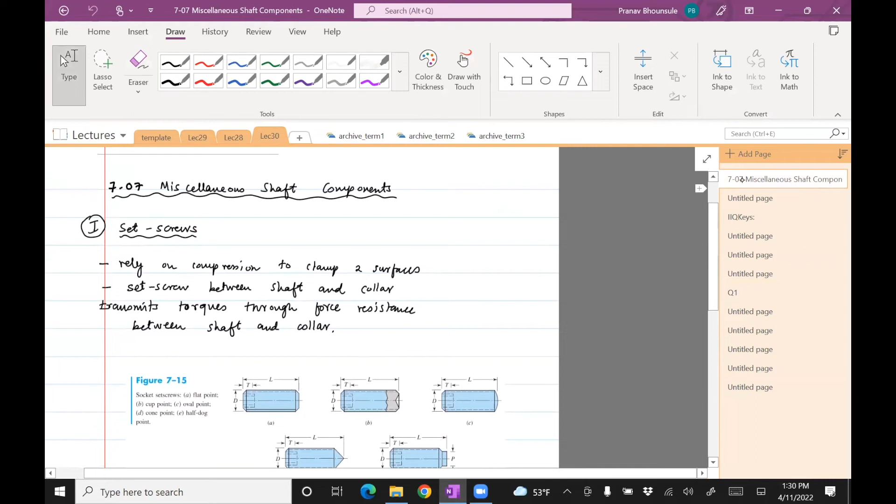So this part is on how shaft components are secured to the shaft. One of the ways is to use set screws.

Set screws are things which you usually screw in, and in the shaft there is a thread which you drill through, so that you can use a set screw to hold on to whatever shaft component you want to the shaft.

So these are some of the set screws which I took from the book. A bunch of them. I don't really have anything special to say about any of them.

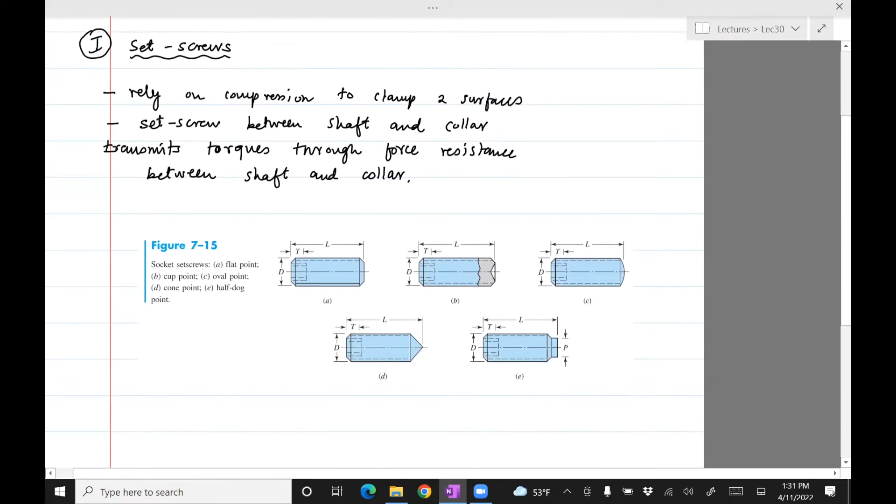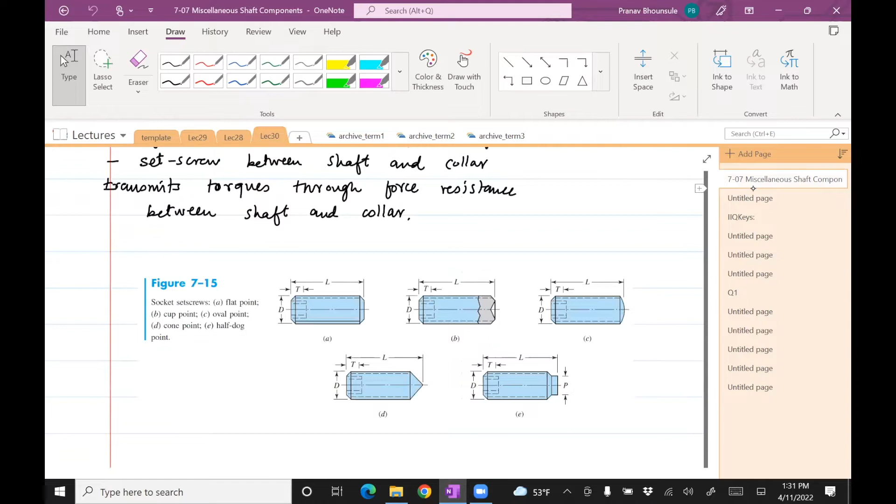When it comes to choosing some of these set screws, there is a seating torque and holding power, and I think you should know what these things mean. So for that, what we need to do is analyze a set screw when it is tightened.

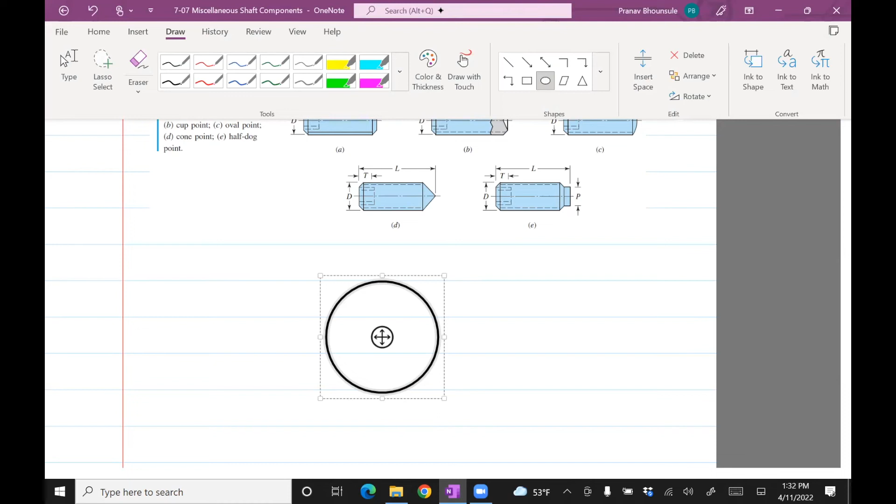So what I'm going to do is draw a top view, or the front view. This is a shaft. And what I'm going to do is attach the shaft to a collar. A collar is just one of the many things you can attach using a set screw.

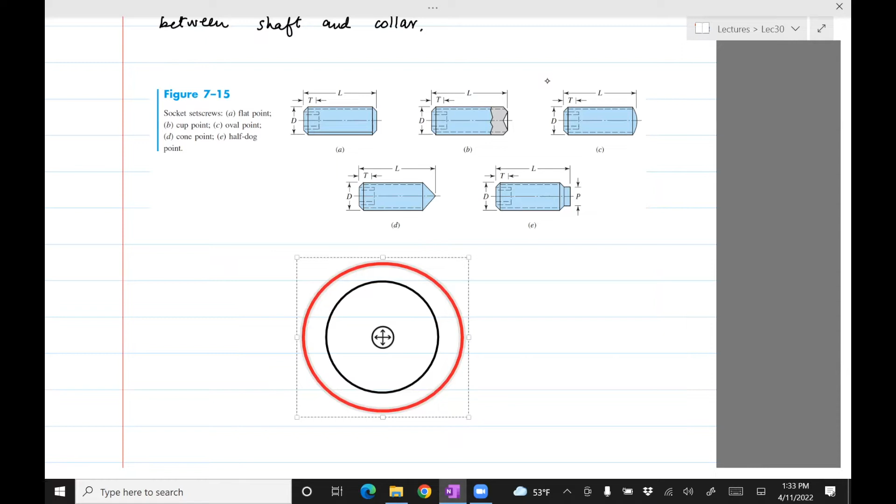Let's try with a different color, red. Okay, looks centered. So this is our shaft, this is the collar, and the set screw is...

It's basically one of these things. It's set there such that it can hold the collar against the shaft.

So assume that this whole thing is torqued. Remember that the purpose of the set screw is to hold things when they are torqued, not really to take axial loads. Axial loads would be loads which you see, in this case, into the plane of the paper. We're not designing the set screw for that.

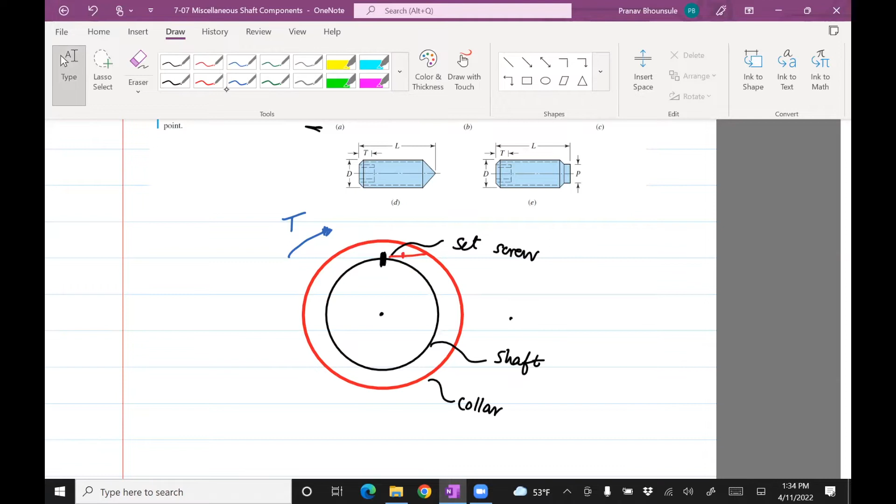The way the set screw holds on to this, or rather keeps this sturdy, is through a force. That force is a holding force. Assume that this diameter is capital D.

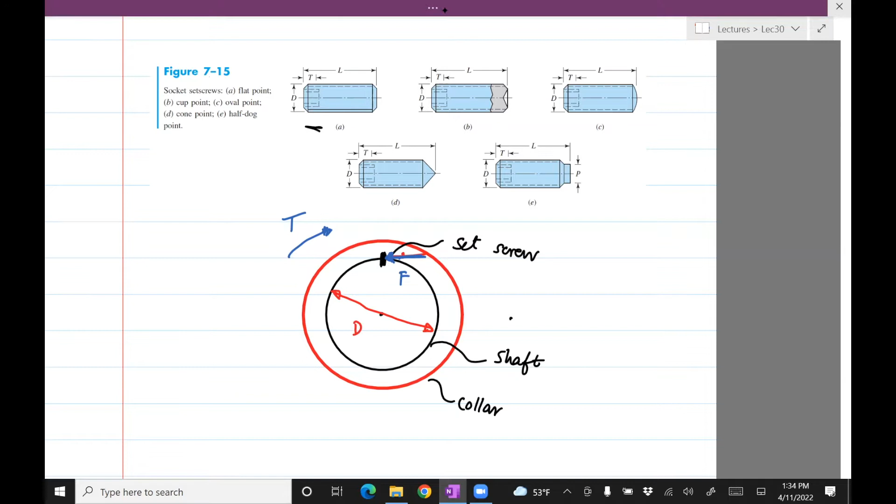So all you need in order to find the torque, compute the torque, is capital F times D divided by 2, right?

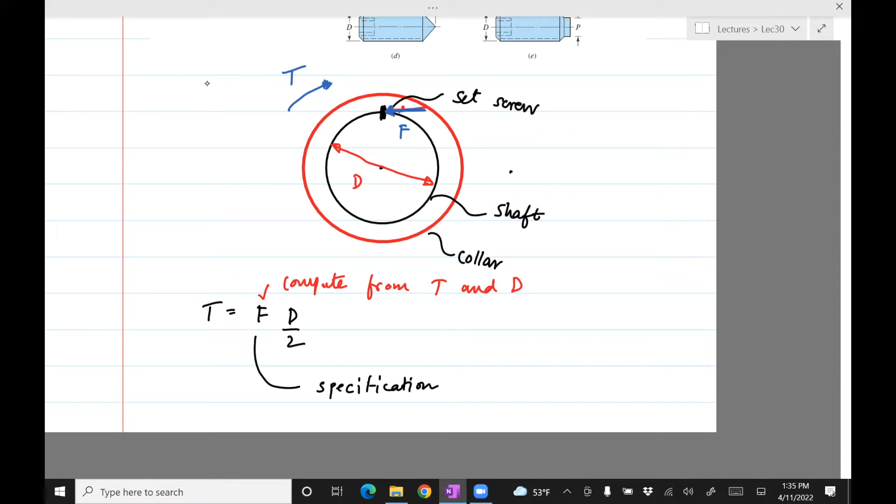So this F is a specification. What you'll do is, if you're given an external torque, and you know the diameter of your shaft, you will then compute F from T and D, right? T comes from your application, D comes from your design, and once you know F, you go to this table.

This says power, but it's really force. And based on what force you want, you'll choose the right set screw.

That's pretty much it. Professor, I have a question: if the F is in the middle of the two values, then what do we have to do? You'll obviously choose the higher of the ones, right? So for example, if it is 300, so your set screw needs to hold a force of 300.

So you'll use the higher of the two, right? You'll use 385, because if you use 250, then it'll get crushed. Just like diameters, if your diameter is lower than something not in the spec sheet, you choose the higher diameter, because if you choose a lower one, your factor of safety goes down. Makes sense, thank you.

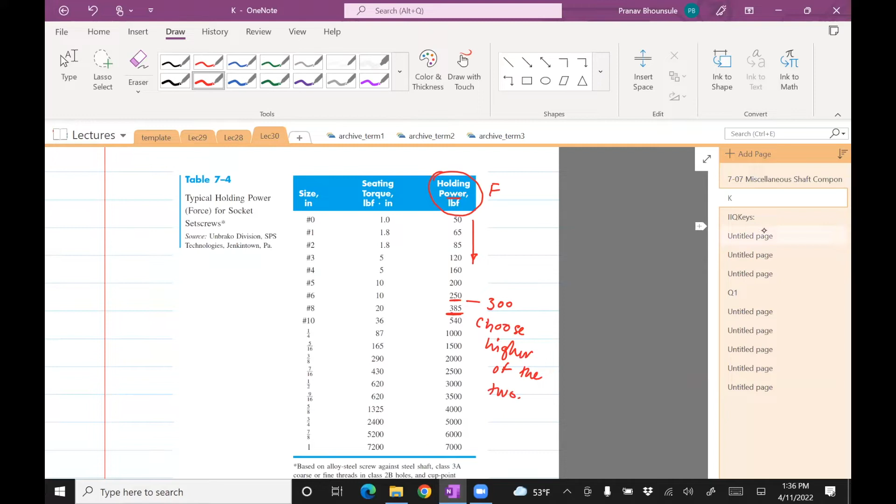Choose higher. Okay, so that's pretty much what is there for set screws.

Here's another way to connect two things on a shaft, whatever you want on a shaft. These things are called keys. This is showing how the key is really attached. It's basically a shaft, which is the inner one. The outer one could be a collar. And then you basically make a keyway inside the shaft.

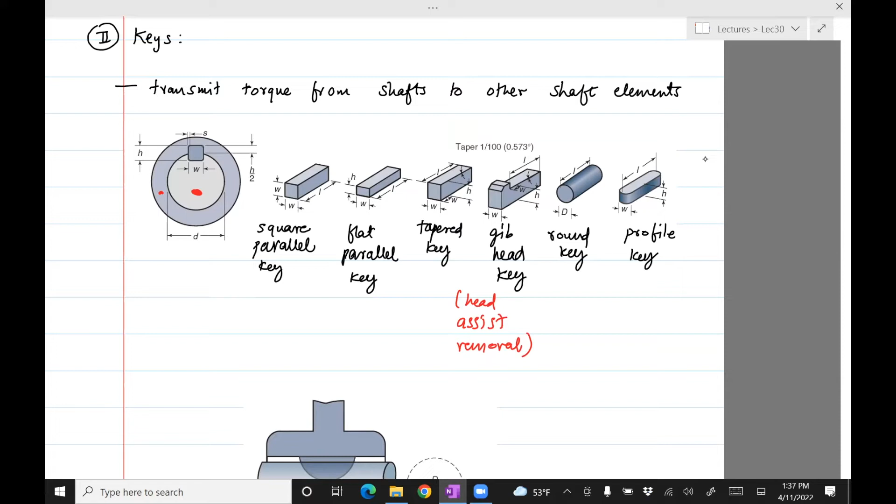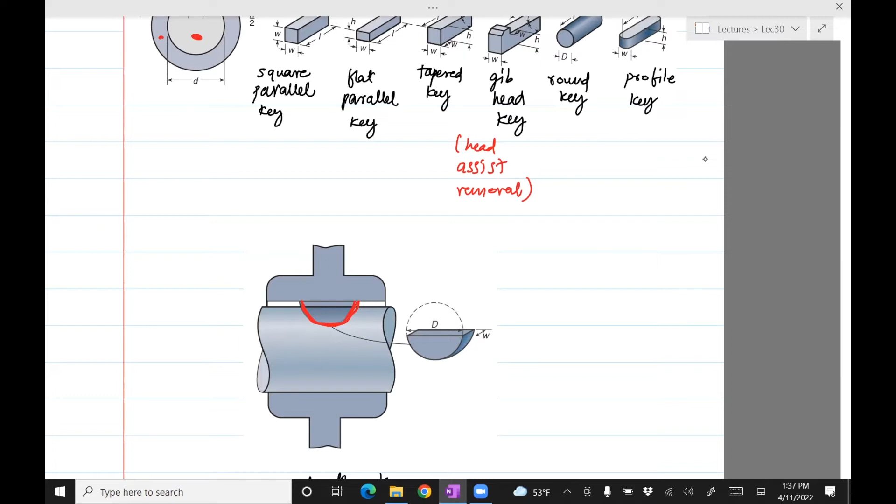Maybe the diagram is here, so you can see this. This is actually a specific type of key, but there is basically a groove inside the shaft. So for example, the shaft, this is the shaft.

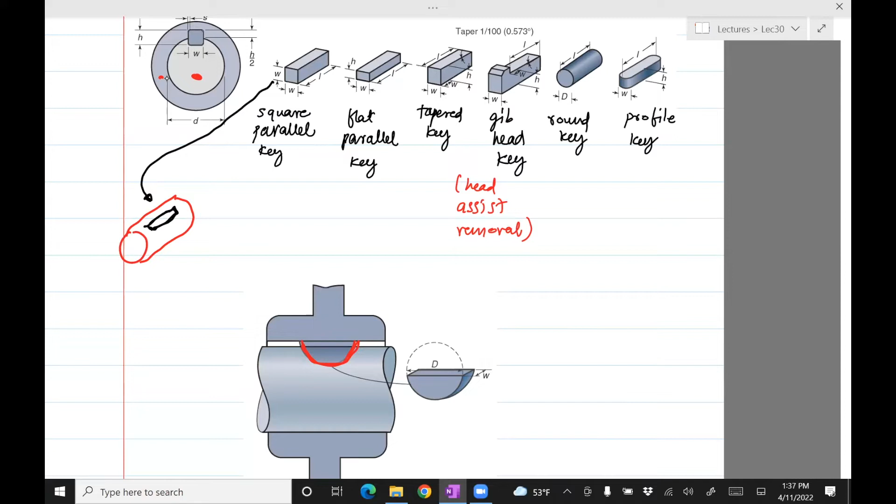What you'll do is you'll make a keyway, such that this key, any of these keys, will fit inside this, but you'll ensure that it fits only half of its height inside this. The other half goes inside the collar. So you can see this: some of it is inside the shaft, some of it is inside the collar. And that way you can hold things together.

So this is one type of key: square parallel, flat parallel, tapered key, gib head key. The reason why you want to have a head is because it's easy to remove by just pulling onto this part. Round key, profile key.

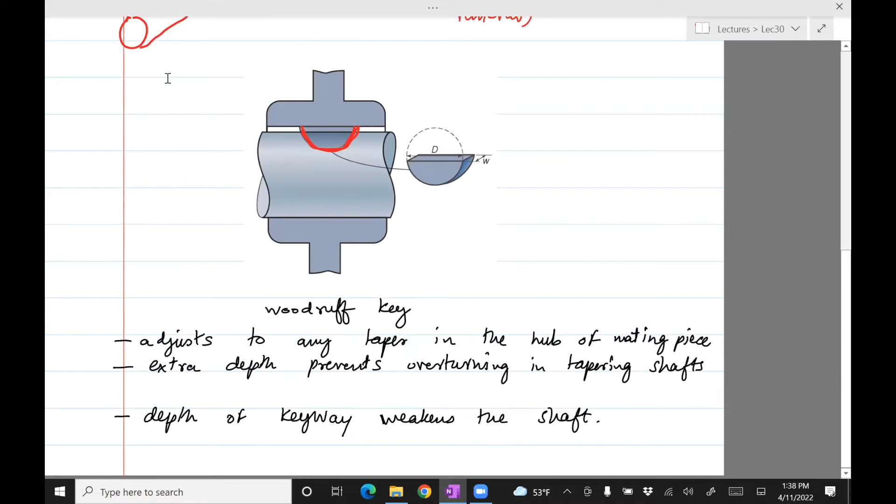This is a Woodruff key. So there's a specific advantage of the Woodruff key: it has a higher depth, and that basically prevents overturning, as it's written down here. The issue with putting something so deep is that it basically weakens the shaft. So each of them has its own advantages and disadvantages.

So even though this one prevents overturning, it weakens, and these keys don't quite have that much force in holding. So there's always a compromise.

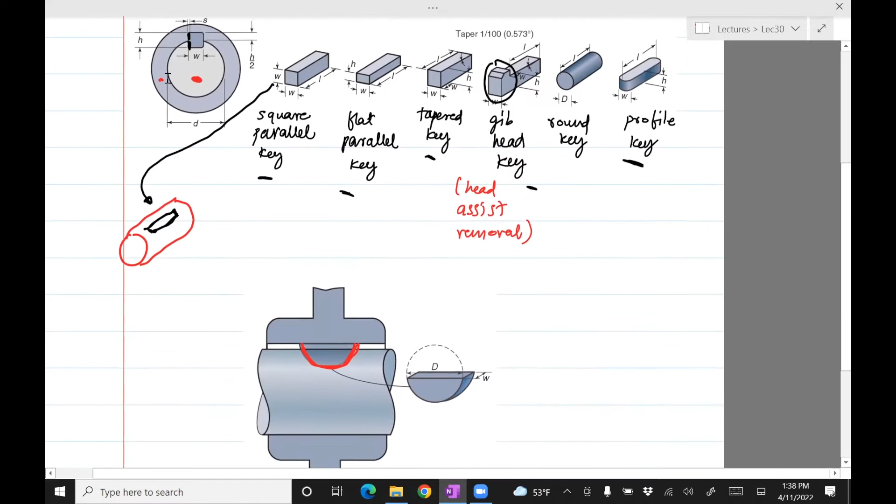So what we'll do is we'll go a little bit more in detail with keys. We'll analyze a key for force transmission due to shear and compression, crushing, and then use that for design. So we're going to analyze keys. Okay, so let's draw a shaft.

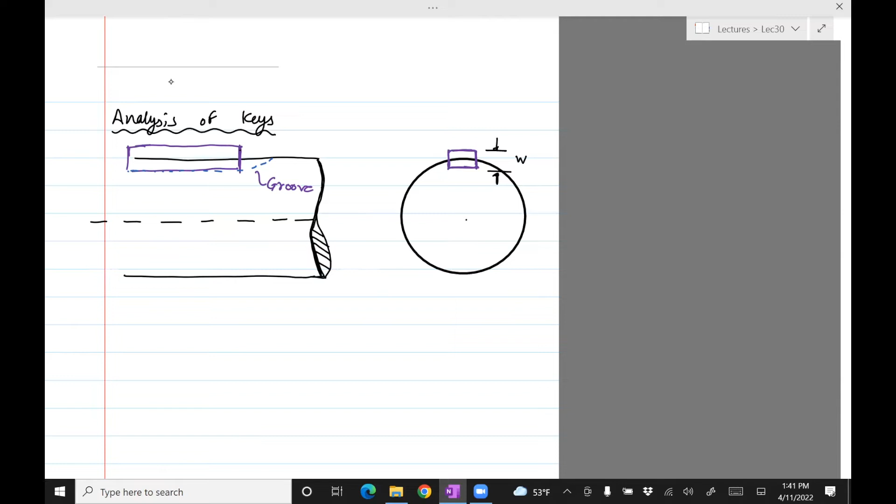Okay, so that's the side view. If you look at it in the front, then all you'll see is a rectangle. Assuming it's a flat parallel key, let's assume the dimensions are the width and the thickness.

Okay, so this key is going to be subjected to forces like this. This is FT, FC.

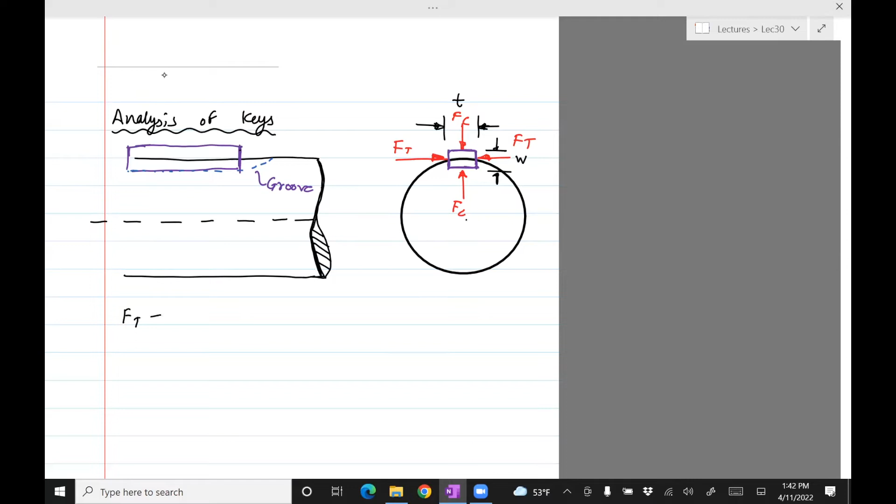So what are these forces? FT is the force due to transmission torques. This is the torque which is being used to transfer from the shaft, for example, from one gear to another gear placed on the shaft.

And then there is FC, which is the force due to fitting inside the keyway.

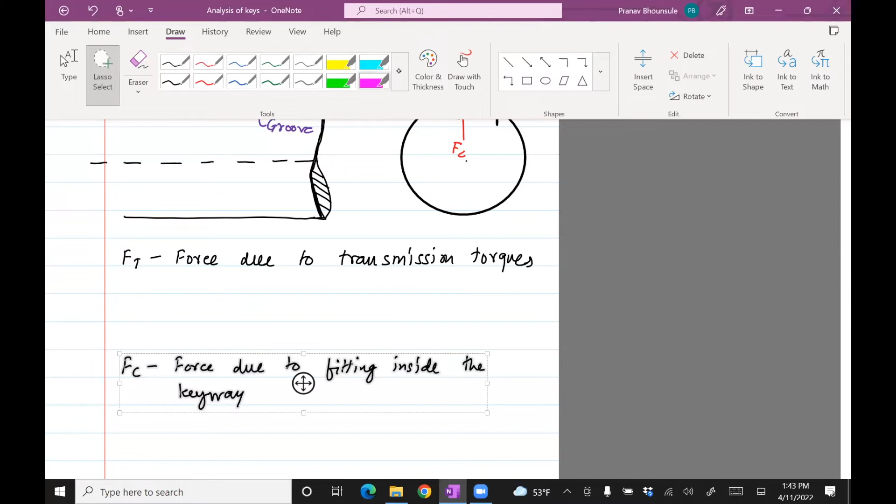Okay, now this force, which is Ft, as you can see, it's basically compressing the key along its length. So this leads to compressive force.

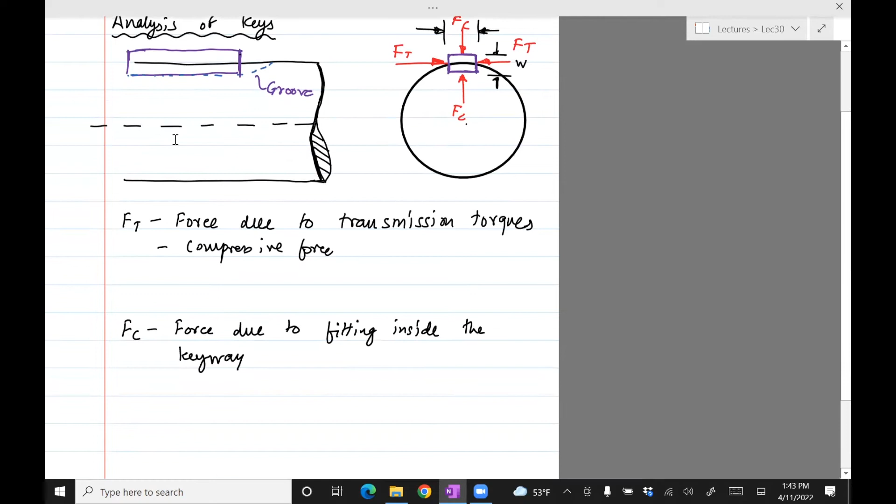Okay, you can see that Fc also leads to a compressive force, but this is understood to be more like a crushing of the key. So it'll crush the key onto itself if that force becomes large.

Now it's usually not easy to determine Fc because it just depends on the fit. If it's a tight fit, then there'll be higher compressive stress. If it's a poor fit, then there'll probably be no Fc and the key can come out. So Fc is difficult to determine.

On the other hand, Ft can be computed from the torque.

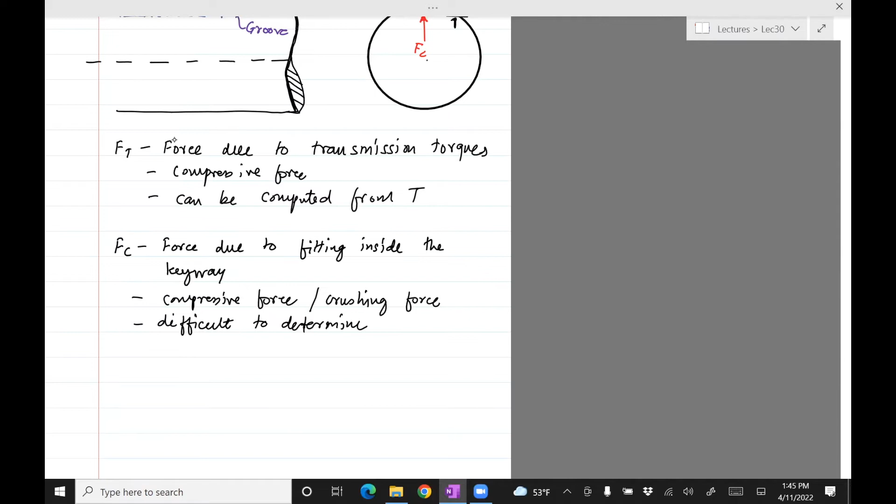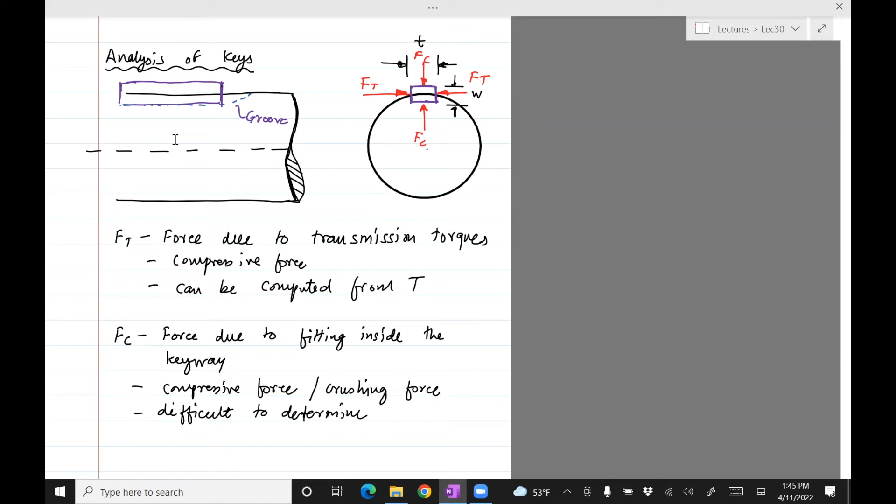Okay, so what we'll do is I will derive an expression for the shear strength of the key. The shear strength is needed because Ft is trying to shear the key. But Ft also leads to a compressive force, so there's a compressive strength calculation too. Those are the two important things we need in order to choose a key in an application. So let's derive those expressions.

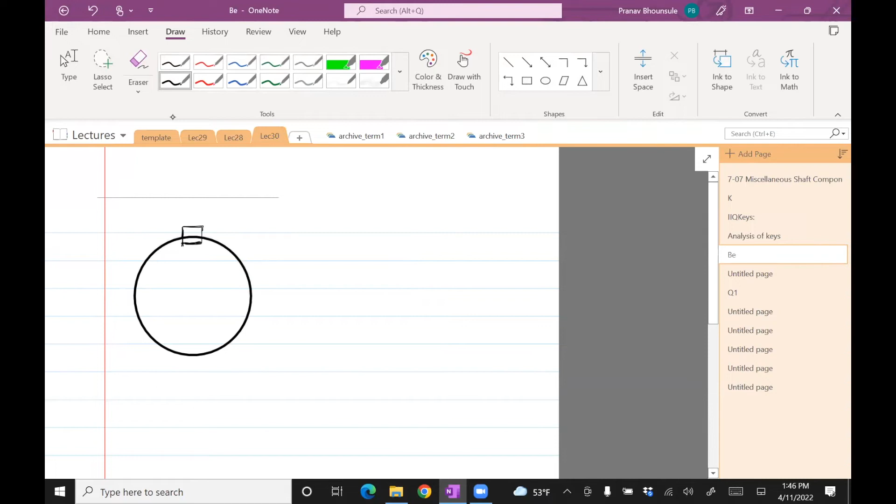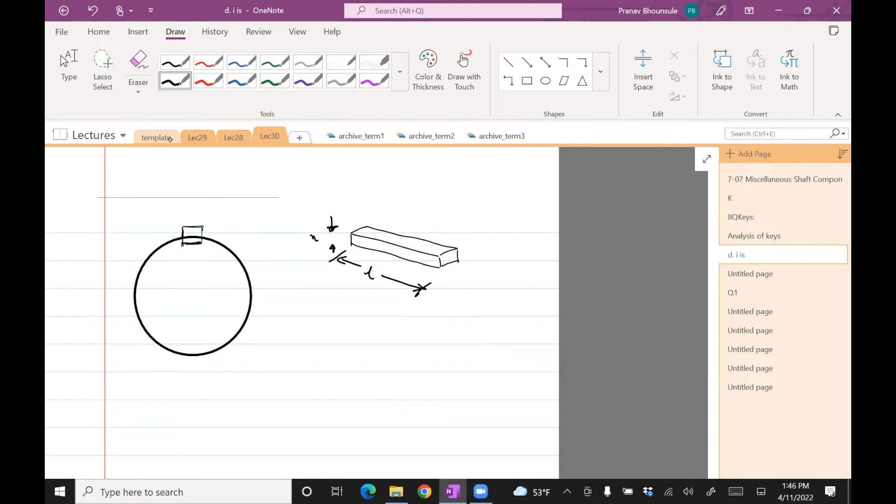Okay, so assume there is a... okay, that's a shaft. I'm just going to show the key without the color. So the side view of this key is something like this, where this is the length, and then this is the width, and this is the thickness. And then assume the diameter is d, so the radius is half of d.

Okay, so because of the force Ft, which I showed earlier, there will be shear stresses like this. And those shear stresses will cause a complementary shear stress in the other direction, as I've shown.

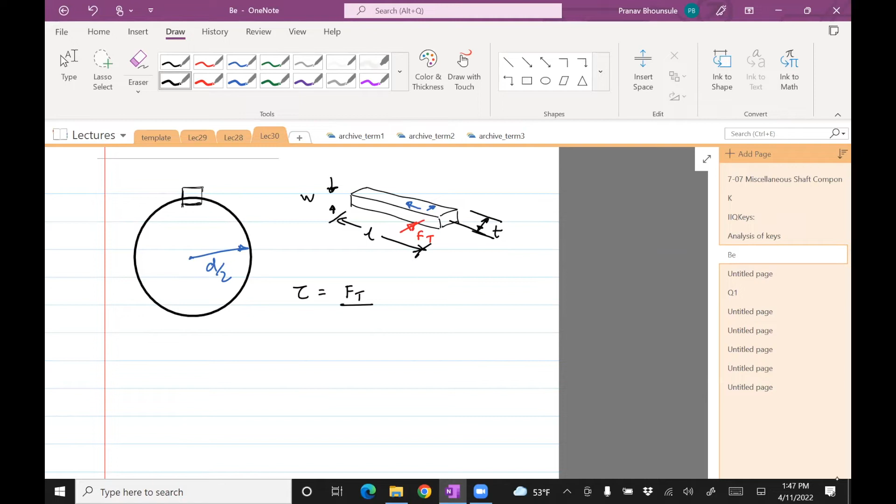Okay, so let's now try to write a formula for shear stress. Shear stress is the shear force, in this case Ft is the shear force, divided by the cross-sectional area over which it acts. So the cross-sectional area is the topmost spot.

So that area is... oh sorry. Yeah, something is... yeah, my bad, this is not the one. Okay, so the shear force should be this area.

And then the torque is Ft times the radius, so d divided by 2.

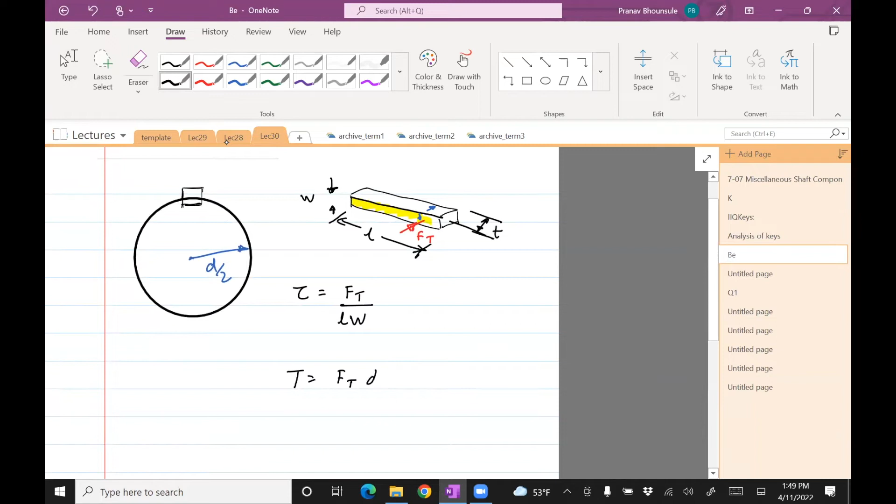Okay, so what we can do is from these two equations, we can eliminate Ft. And so we get Lw tau equals 2T divided by d.

Okay, and then we have a formula for shear stress. It's 2T over dlw.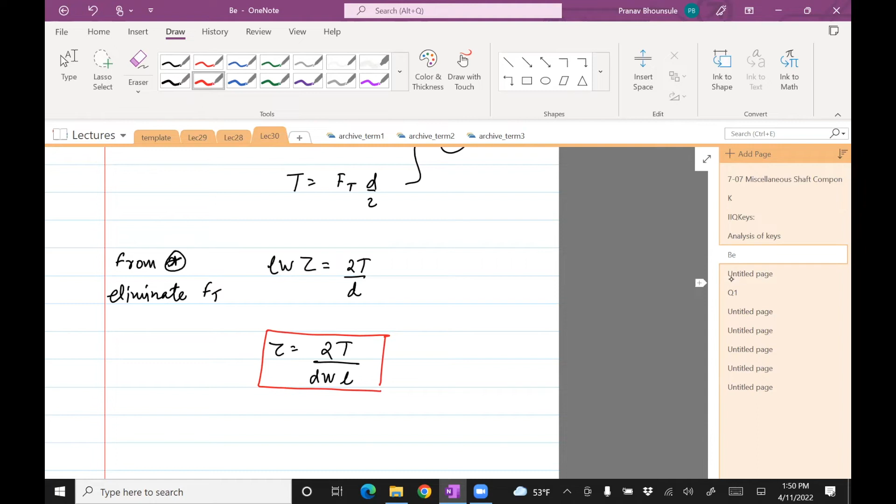Usually you don't have thickness in this way, so I just make that W on top, and then this should be T. Okay, so that's a key in a keyway, first of all a groove or keyway in a shaft, and then there's a key. And the dimensions are shown.

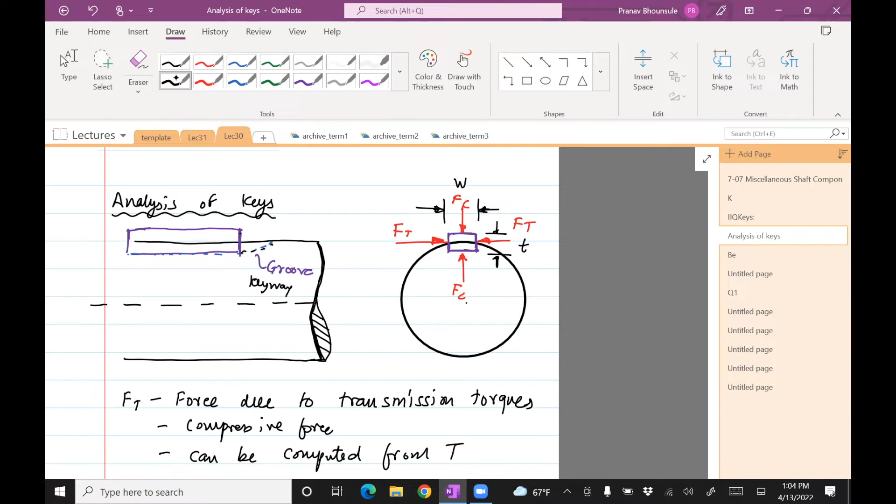I said there are two forces. Ft is the force which comes due to the torque, and Fc is a crushing force because of the way the key is put inside the keyway, and that force is usually difficult to determine. Okay, so both forces will lead to crushing.

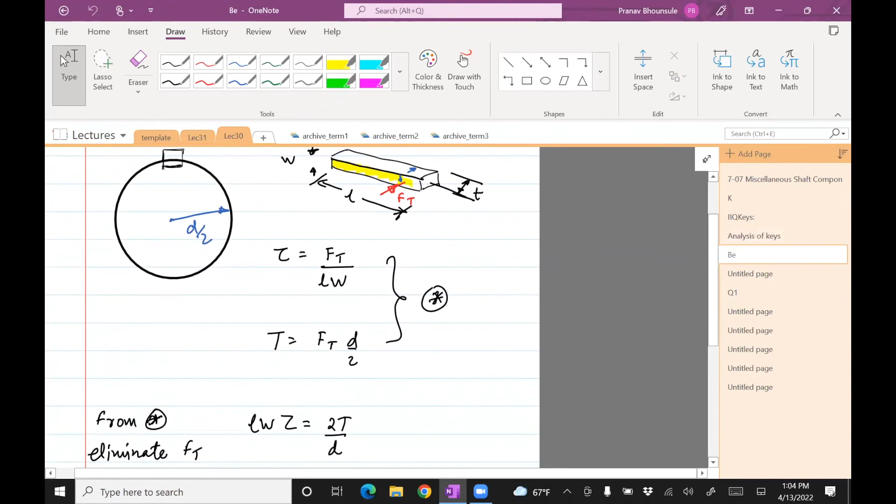We were analyzing this, and again I did the mistake here. This is thickness, and this is width. Yeah, so change one more thing, and then we are all set.

So the shear stress is the shear stress on the top or any layer which is along the top surface. So what we did was we're trying to derive an expression for the shear stress, tau, and there'll be a complementary shear stress, just to keep the thing in equilibrium, so that the tau should appear as a complementary pair.

Okay, so here we have an expression for shear stress just from definition: force divided by cross-sectional area in the yellow area. We can also find an expression for the torque based on the force and the diameter of the shaft. Then we eliminate Ft in the two starred equations, and so we get an expression for shear stress. So that's the shear stress.

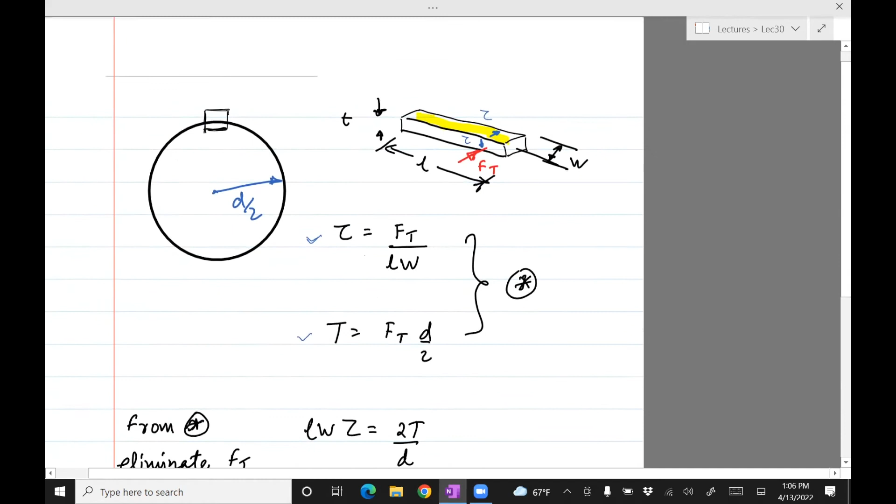That's one important consideration when we are looking at a key. Next is what else this force would do. Besides shear, it will tend to crush the key, leading to a compressive stress. So we can also look at the compressive forces. Let's look at that.

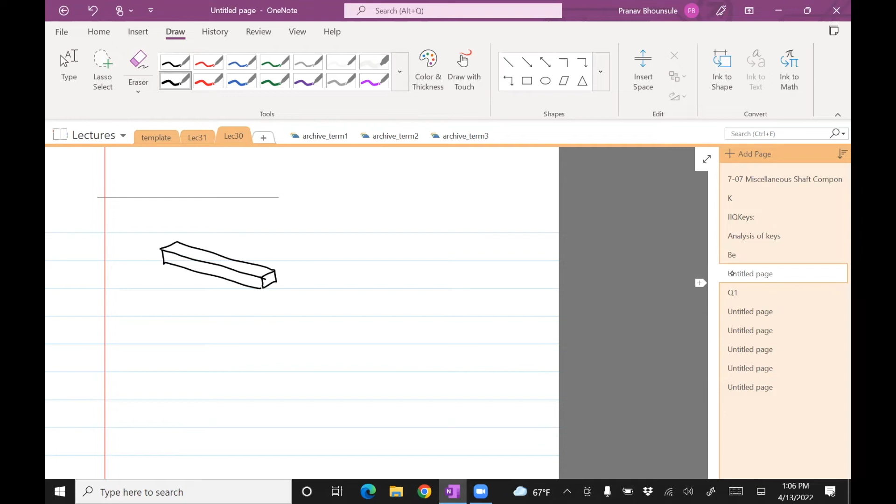Okay, so here we have a key. The way this key is placed inside a keyway is half of the keyway is in the shaft and half of it is outside. So the part which is going to be crushed, we're going to assume is halfway. So just half of it is going to be under compressive stresses.

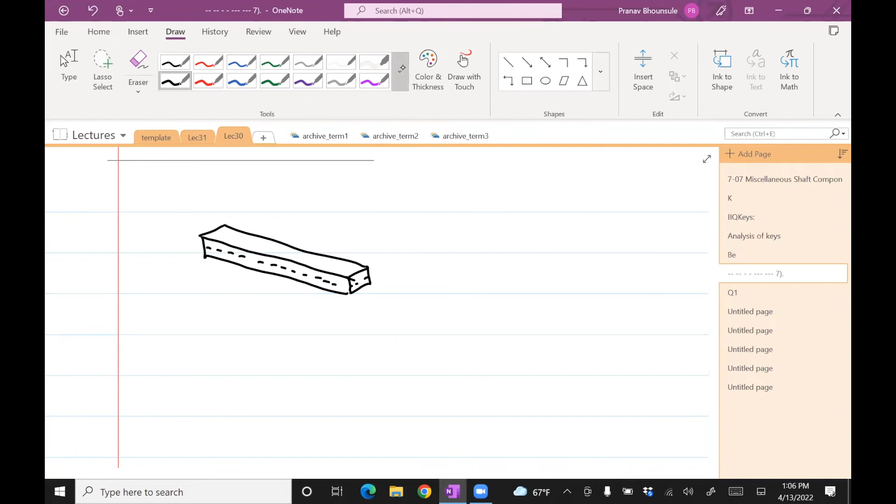So again, this part, let's assume is half of the thickness, and the force of compression is as usual. I call it Ft because it's the force which comes due to the torque. And then what do we need? We need the length. And I think that's it. So this leads to a compressive stress.

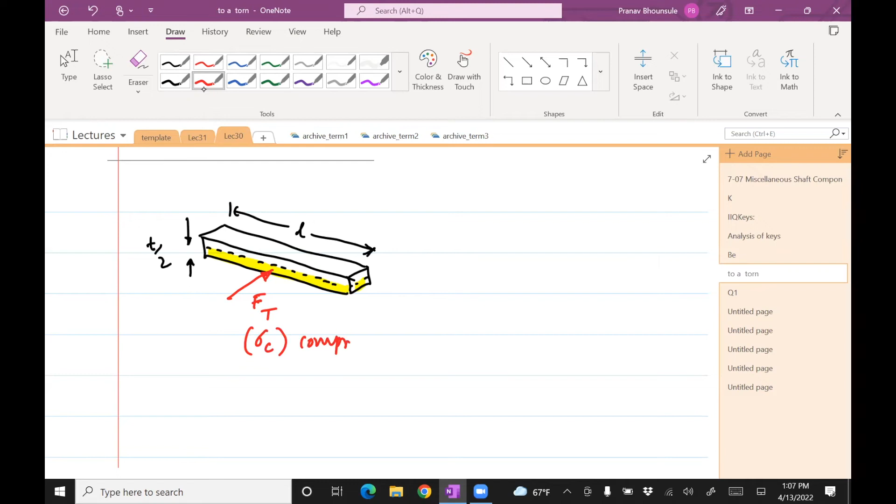Okay, so let's write an expression for the compressive stress. Sigma C is the compressive, or crushing, stress.

Okay, how do we do this? Well, first of all, the stress sigma C is going to be the force divided by the area over which that force acts to compress this. In this case, you can see the cross section is the yellow area, length times T divided by 2.

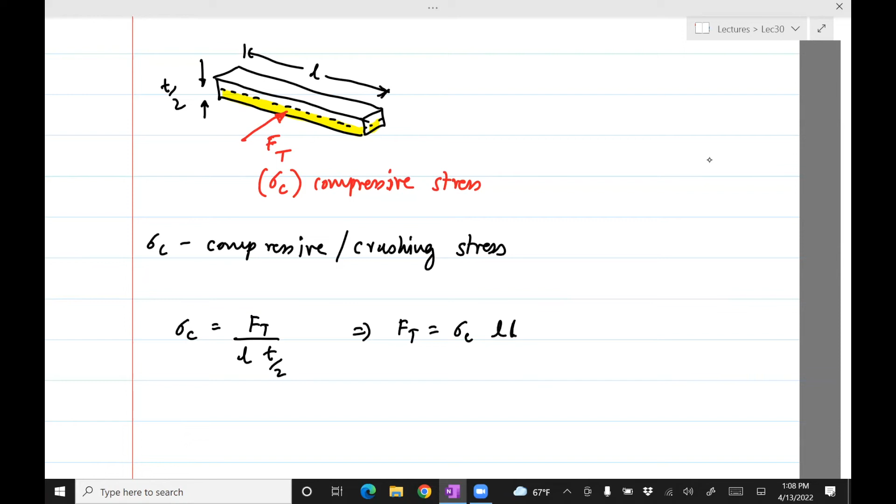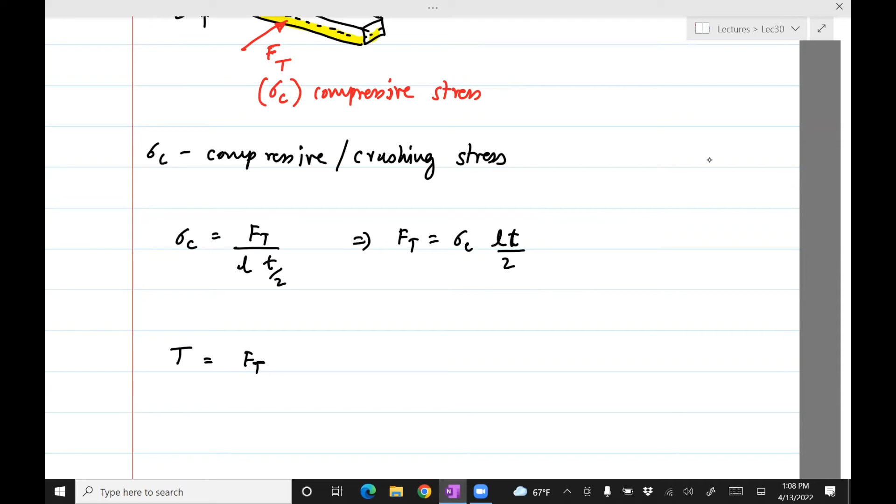And so we have Ft equals sigma C times L times T divided by 2. But then we also know that the torque is Ft times D divided by 2, so this is just the shaft, Ft, the torque, that's D divided by 2. It's basically force times distance, and the distance is from the center.

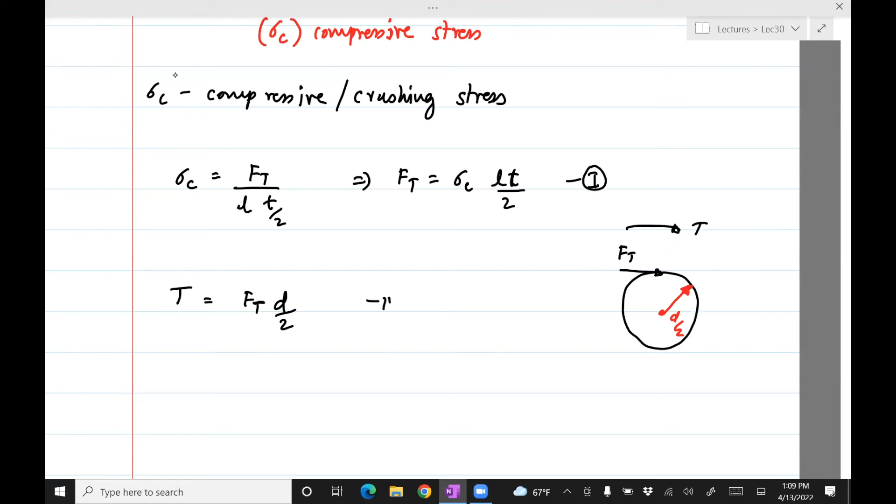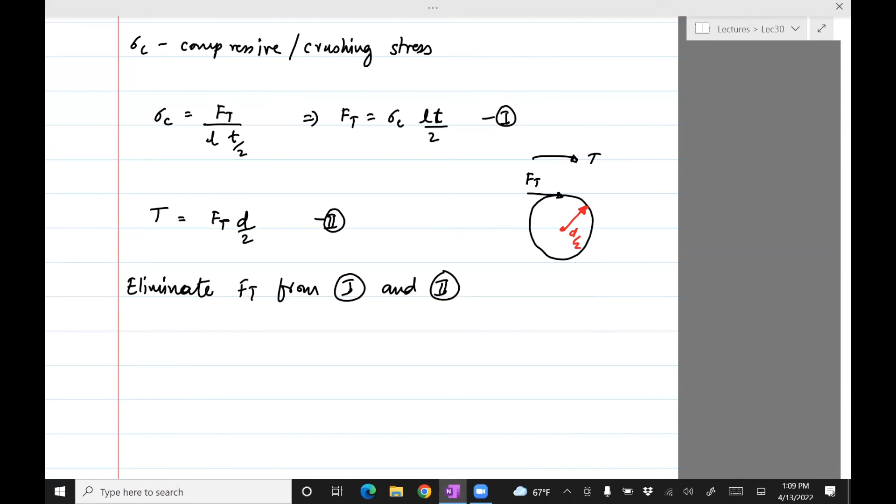So let's take 1 and 2, and eliminate Ft from 1 and 2. If we do that, we can get an expression for sigma C. So let's just do it: sigma C times L times T divided by 2 equals 2T divided by D.

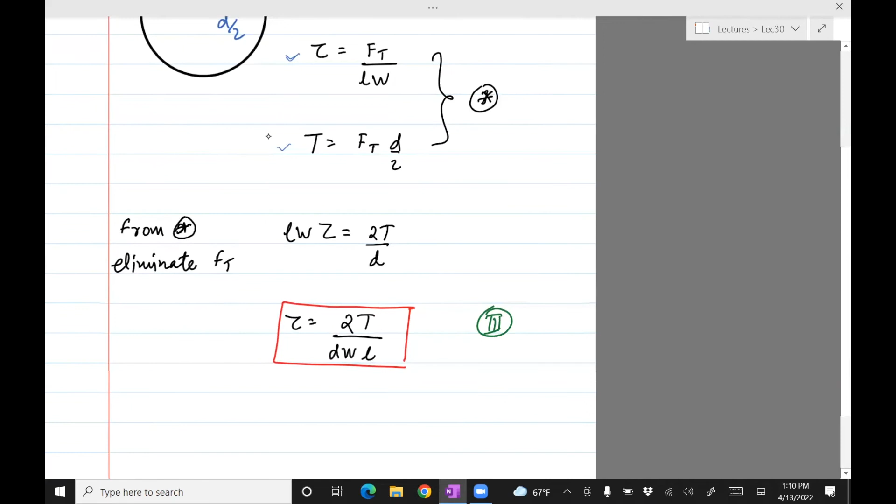So sigma C equals 4 times T divided by D, L, and T. Let me just have a number for this one. Let me call that number 3, and this one number 4.

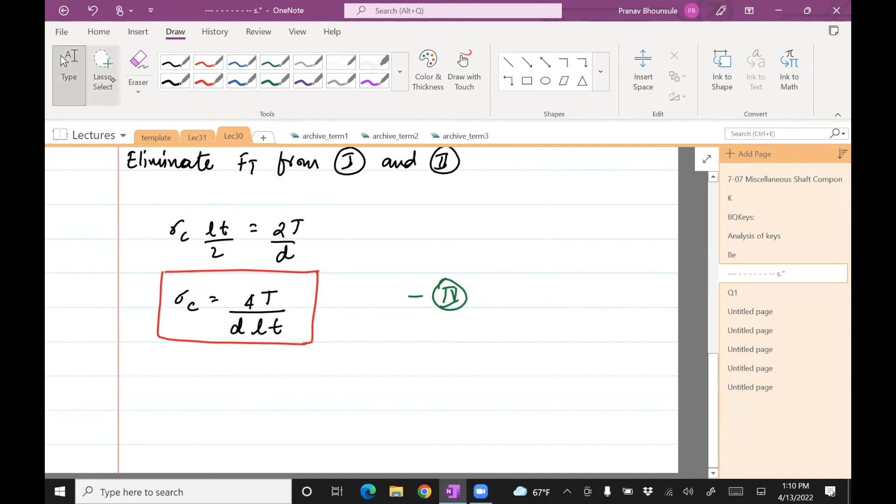So from 3 and 4, you can see how the crushing stress and the shear stress are related. So you just take the ratio of the two: sigma C divided by tau equals 2 times W divided by T. So if the width was the same as the thickness, then the crushing stress is twice that of the shear stress.

Okay, so depending on the dimensions of the key, that is true. So those are the two important stresses: shear stress and crushing stress. So let's see. Well, just before we start a problem, we can also define a factor of safety for keys, just like we have factor of safety for shafts. Let's define those and then do the problem.

So design factors, and a factor of safety when you are done with the design, right? Design factor. Okay, so there are two design factors: one for crushing, based on crushing strength, and one based on shear strength. You'll use the one which is going to be the lower of the two as the final one.

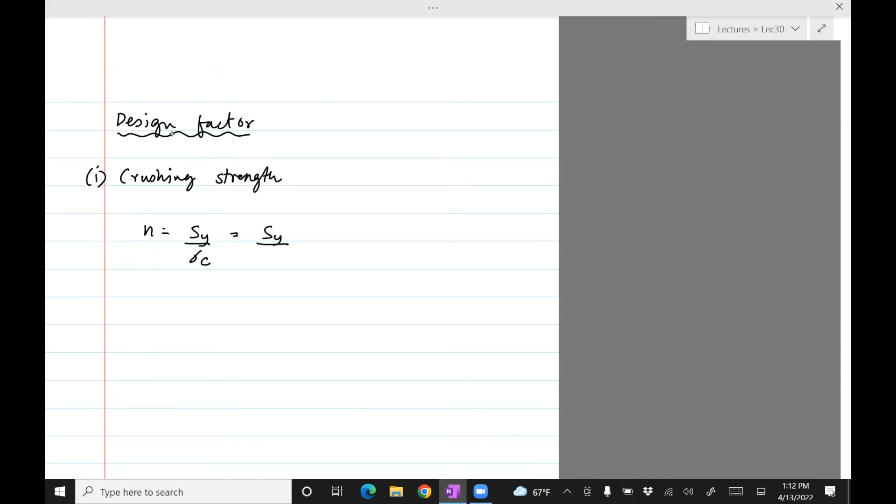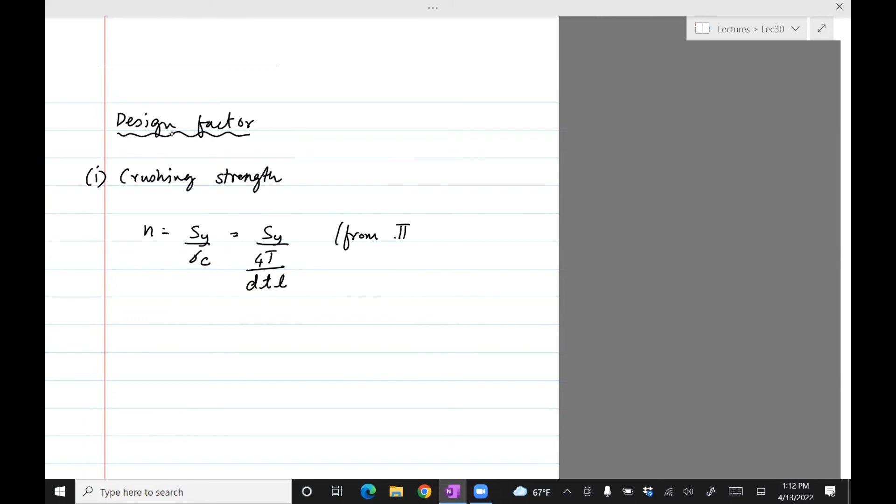So based on crushing strength, we can write SY divided by sigma C. So now I'm just going to substitute the formula for sigma C from the previous page, 4T divided by D times T times L. I believe that was equation 2. Quickly check that. Oh, sorry, it's equation 4 and then 3.

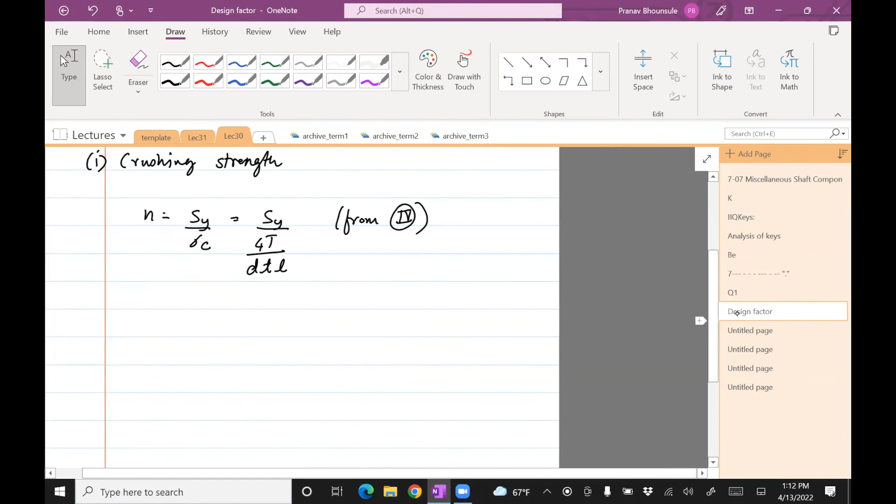From 4, and so we can write N equals SY times D times T times L divided by 4T.

And then we have the shear strength, the factor of safety based on shear strength. That's simply N equals the shear strength, which is going to be denoted as SSY, divided by the shear stress. SSY is given, and the shear stress in this case was computed to be 2 times T divided by D W L. So that comes from number 3.

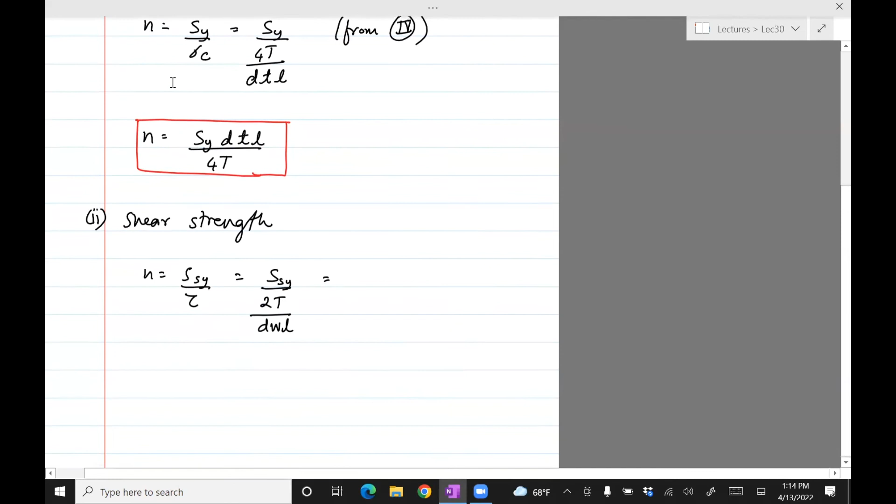Okay, so we can now write an expression for N: SSY times D times W times L divided by 2T.

Okay, now there is actually an expression which relates SSY with SY. This comes from distortion energy theory, and this is something which I've done in the past. I've shown how this is true. You just have to relate the shear sigma with tau. There's a simple relationship: I think tau is half of sigma.

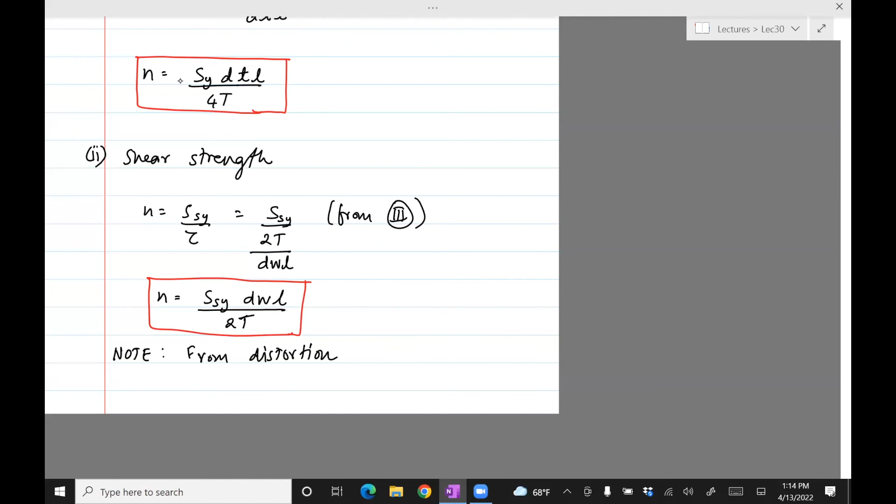And then from that, and from distortion energy theory, we can compute the relation: SSY is 0.577 times SY. Okay, so don't worry about remembering that, but I'll give it to you.

Professor, just want to confirm, if SY is given, so we can find SSY from this formula, right? Yes. Thank you. Okay, let's do a problem.

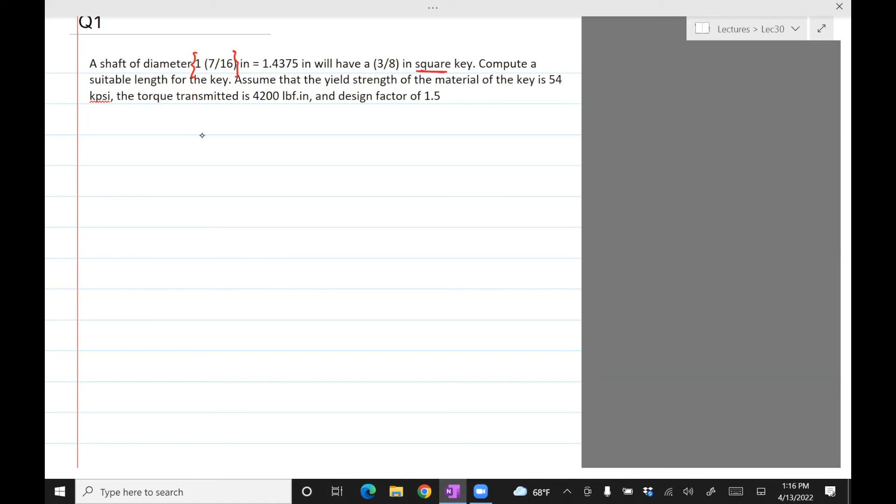Okay, a shaft of diameter, the whole thing is 1 and 7/16 of an inch. So I did the conversion for you: 7 divided by 16 added to 1 equals 1.4375. We'll have a 3/8 inch square key. So square, that's important. Compute a suitable length for the key.

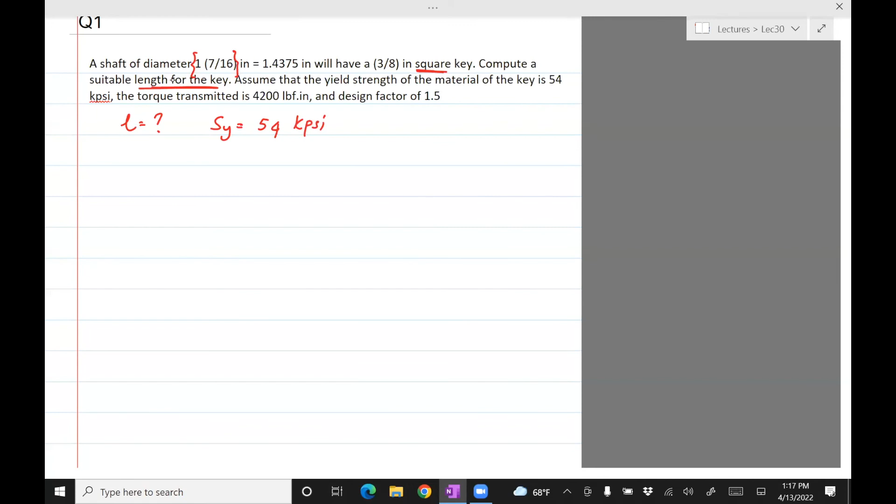So the length is unknown. Assume that the yield strength of the material of the key is 54 kpsi, so SY is 54 kpsi. We're given the torque, 4200 lbf-in, and the design factor ND is 1.5. Let's call it N.

Okay, so there's something else which is given: diameter. I should put that in, 1.4375. And for a square key, that means that this is our width, and this is the thickness. A square key means this thing is square, so the width should be equal to the thickness, and that is 3/8 of an inch.

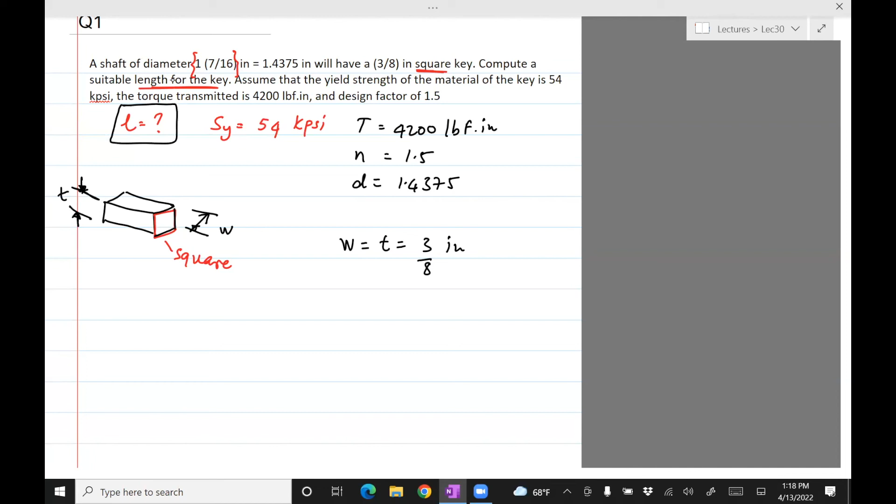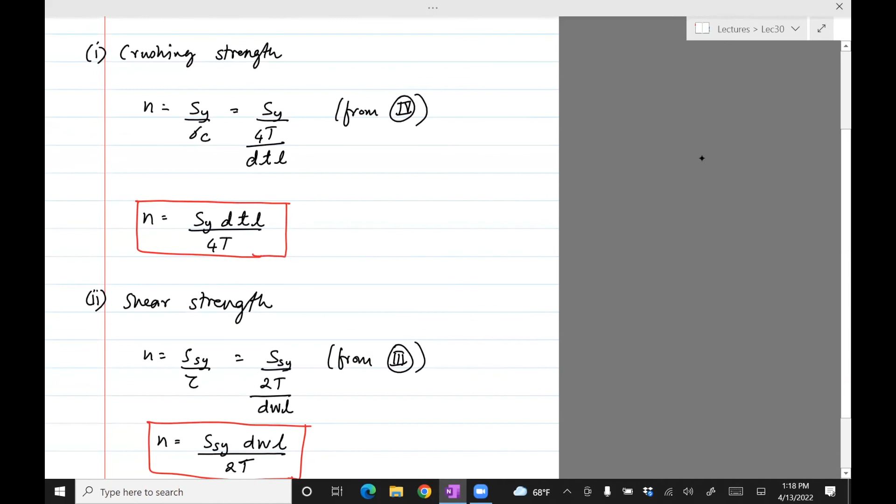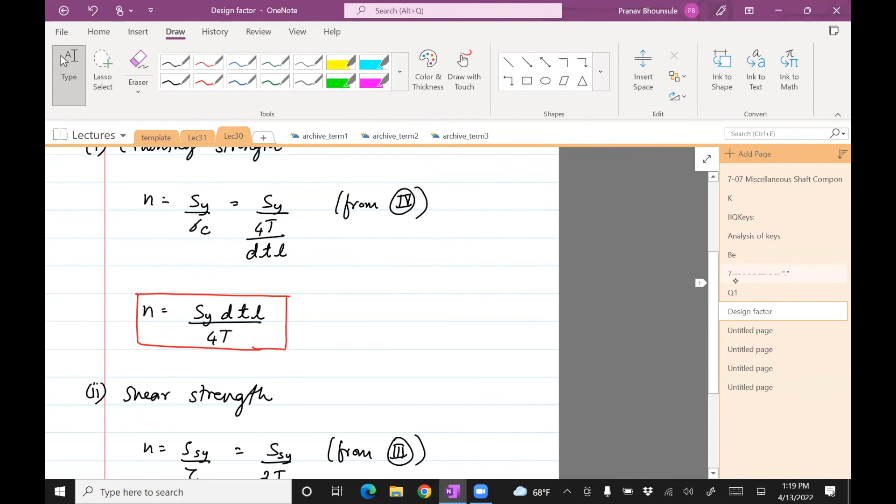As I said, you need to compute the length, given the factor of safety. If you go back and look at the formulas we derived, there's a formula for crushing strength - that's the factor of safety assuming it's going to fail in crushing. And then there's another formula for shear strength, assuming it's going to fail in shear. Before we design this, we don't know if it's going to fail in shear or crushing. One way to do this is to first figure out which of the two stresses is the bigger one - whichever is bigger is the more critical one, and use that to design L.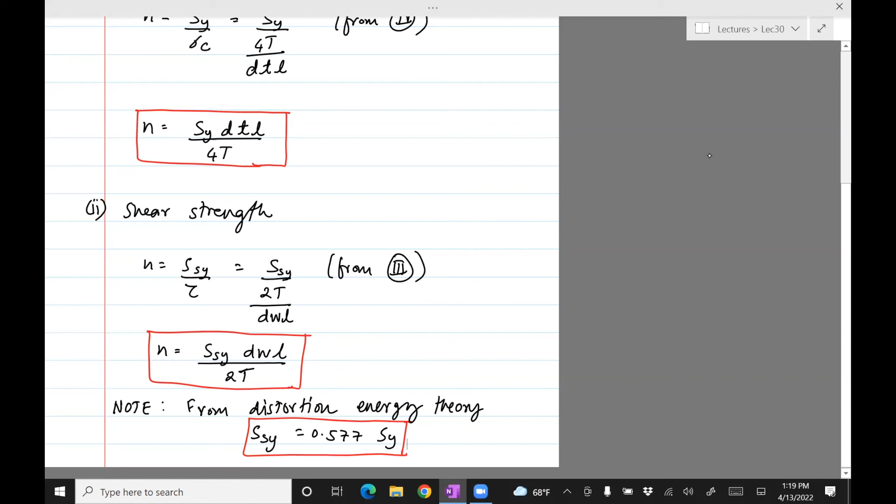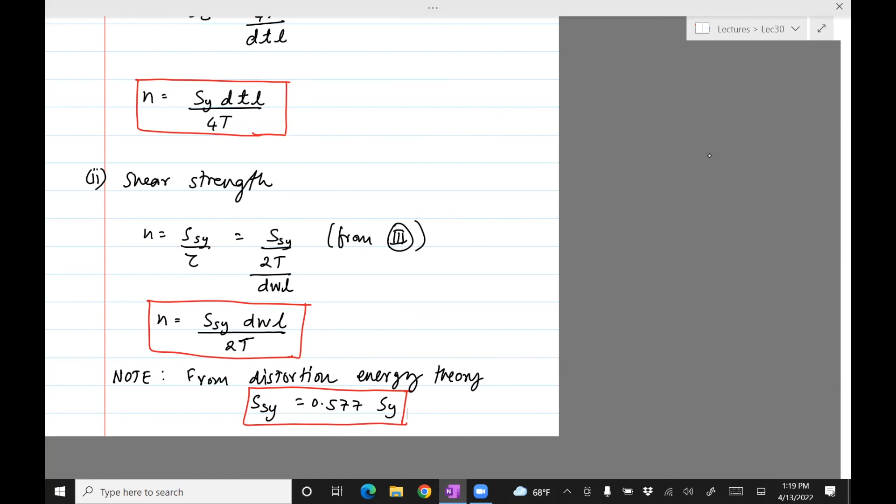That's one way to do it. The other way is to not assume that, and instead design based on failure in crushing and design based on failure in shear, get two length values, and use the larger of the two, just like we did for diameter of shafts. So let's take that approach, because it's more direct and less error prone. Okay, so here's what we'll do.

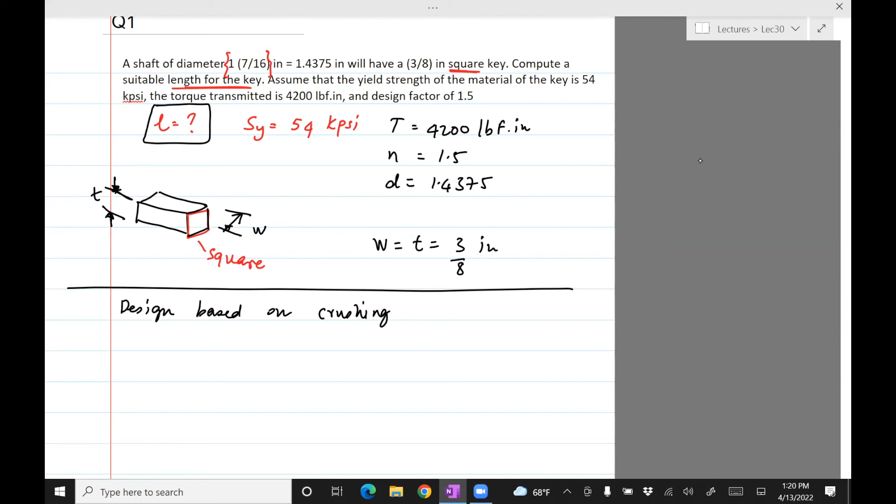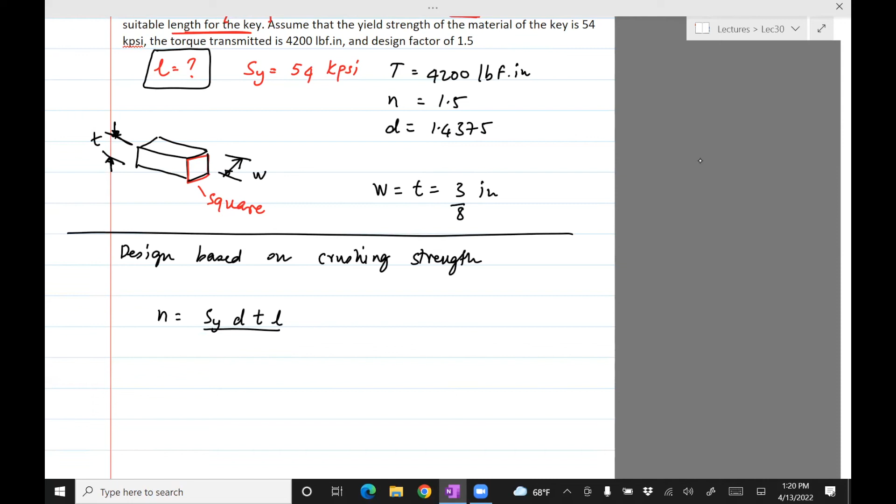Design based on crushing strength. Okay, so the formula I wrote down for N based on crushing was SY times D times T times L divided by 4T. So here we are given SY, N, D, T, capital T, and then L is unknown, so we can solve for that.

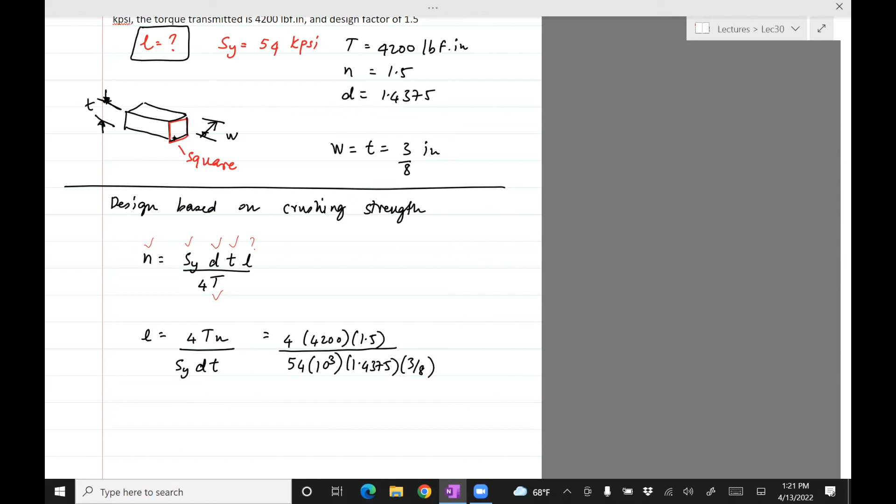So we have L equals 4TN divided by SY, D, T. T is 4200, N is 1.5, SY is 54 kpsi - let's convert kpsi to psi. D is 1.4375, and T is 3/8 of an inch. Since all the units are now in inches, IPS, we can compute L in inches. So L comes out to be 0.866 inch. Very short key.

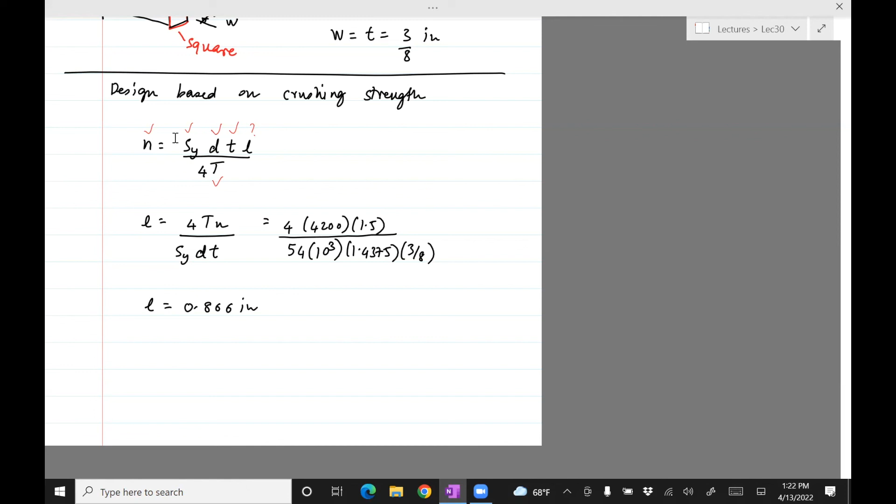Okay, so that's our answer, but that's not the final answer, because we don't know if the key will fail in crushing, or which of these is the critical one. So let's then compute the length by basing our design on shear stress. Design based on shear strength. Okay, so for that we would need SSY.

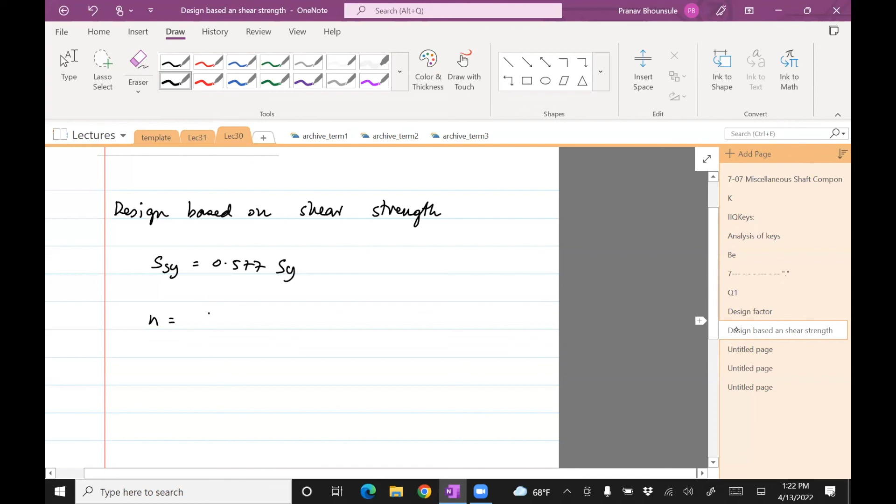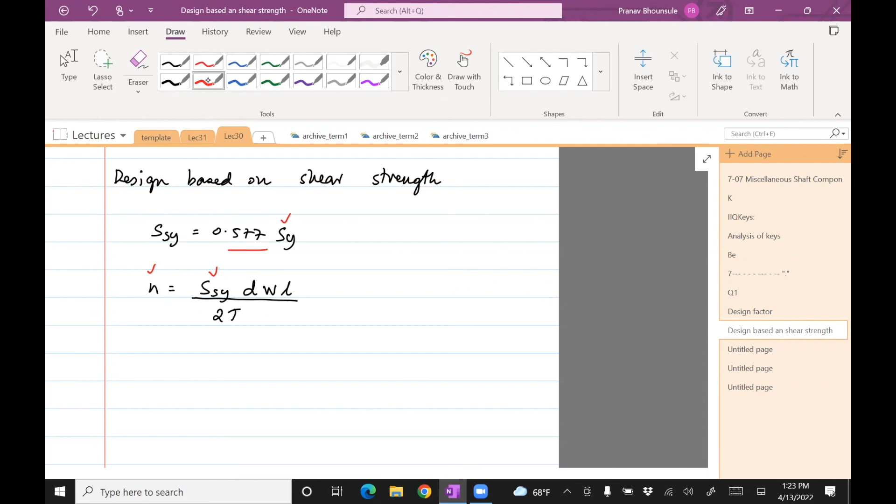So let's just compute that - it's 0.577 SY, that's the first thing. The other thing is the factor of safety: design factor N is SSY, D, W, L divided by 2T. I just copied the formula from the previous page. Okay, so again, N is known, SSY is known because now we can compute that, D is known, W is known, L is unknown, and T is known.

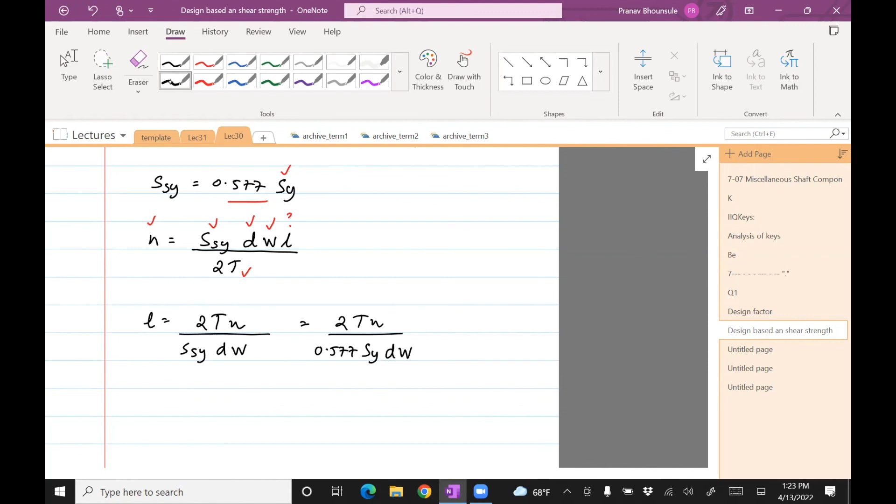So let's solve for L: 2 times T times N, divided by SSY, D, W. So 2TN. I'm going to sub in the value for SSY, 0.577 SY, D times W. Okay, let's now put in the values.

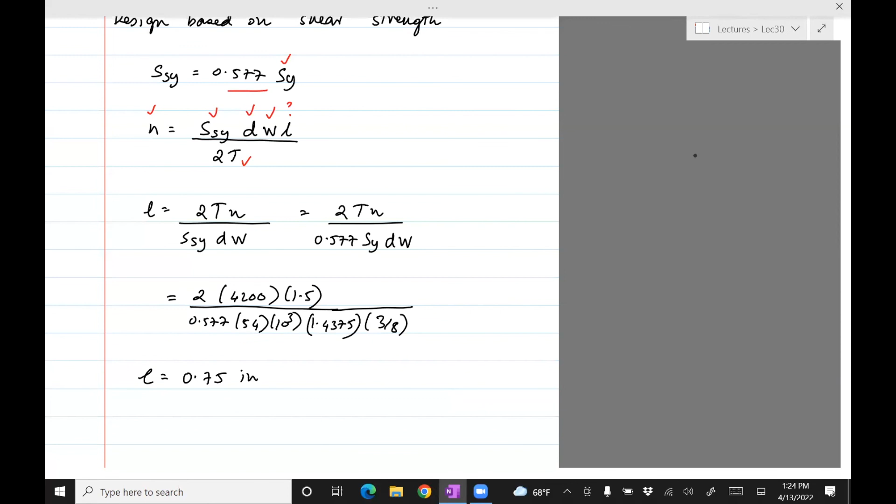T is 4,200. N is 1.5. SY is 54, kpsi is 1,000. D is 1.4375, and finally W is 3/8 of an inch. So we have L equals 0.75 in. Okay, so we have...

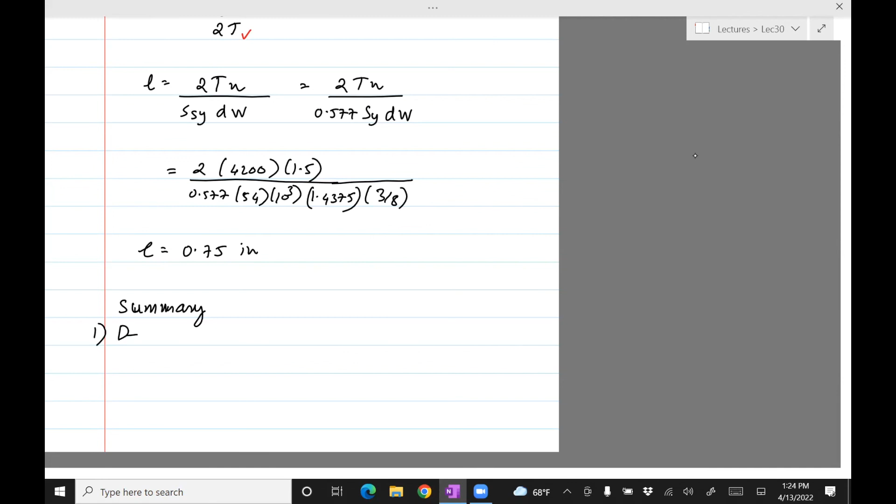So just put it this way, a summary: design based on crushing strength gave us 0.866 in. Design based on shear strength gave us 0.75 in, and we have to choose one of them.

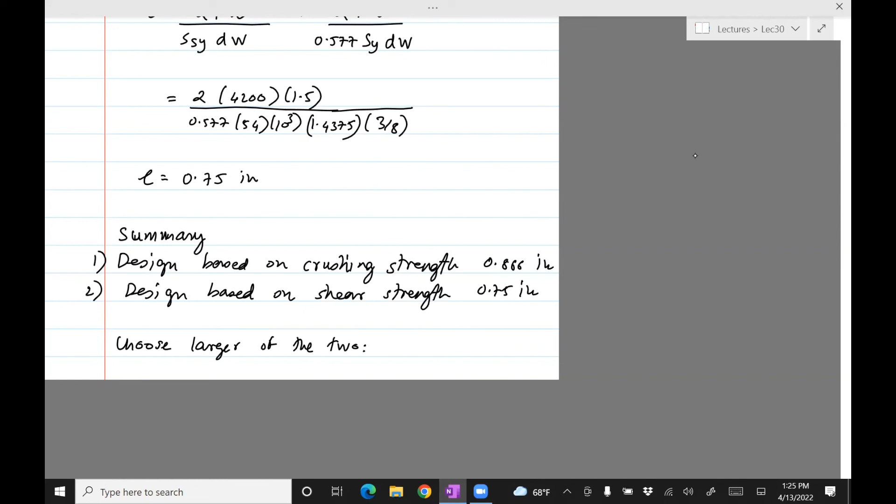So if you use 0.75 and design this, you will see that the factor of safety - if you put that value for the length in the first part based on crushing strength - will actually come out to be less than 1.5, which you don't want. That's why you need to go for the larger of the two. So choose the larger of the two. So we have L equals 0.866 in as our final answer.